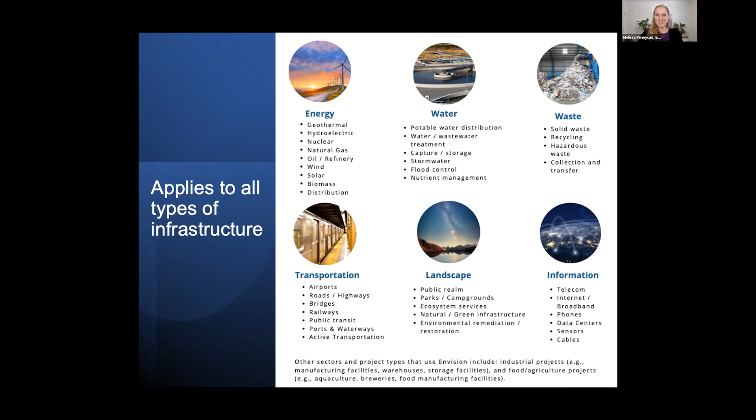Envision is a great tool that helps governments and communities address a number of pressing priorities and challenges. So Envision can be used to support the attainment of net zero energy and emissions, as an example. It's a great tool to help mitigate and adapt to climate change. There's credits within Envision that focus on equity and social cohesion, economic development, sustainable resource management.

The list goes on. And what I've done on this next slide is I'm giving you a view of, at a glance, all of these sustainability and resilience indicators that are included in the Envision framework. So it really covers everything under the sun that comprises sustainability and resiliency from an infrastructure perspective. And I've highlighted particular credits on this slide that link back to those community and government priorities on the previous slide.

I want to also give you a credit close-up. So when I talk about this term credit, this is a term that we use to talk about each sustainability and resiliency indicator that's included in the framework. So we call them Envision credits. There are 64 of them in total, divided across 5 credit categories, including quality of life, leadership, resource allocation, natural world, and of course, climate and resilience. And each credit is formed in the same way. So typically it's presented in a 2-page spread.

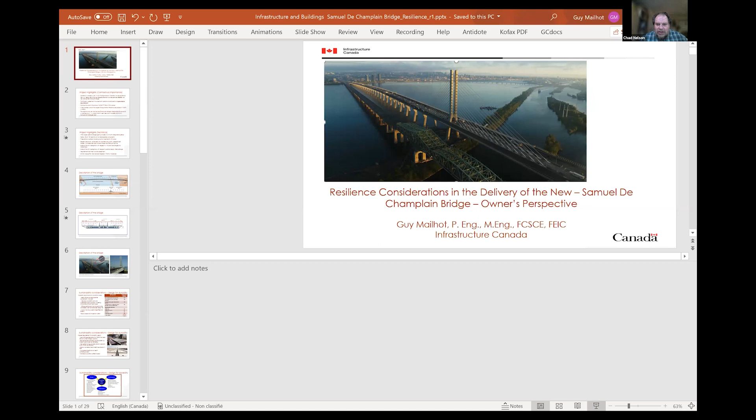So, well, first of all, hello to all from Montreal. It's a real pleasure to give this presentation describing some of the resilience and sustainability considerations which were accounted for in the delivery of the bridge. I hope you will enjoy the presentation and hopefully find it interesting. To start with, you can appreciate in this slide the new and original bridge. Unfortunately, this scene no longer exists as shown. The original bridge is currently being totally deconstructed after only 60 years of service, so not a very good example of how we define sustainability.

Some of the project highlights include a contract award in June 19, 2015 under a PPP delivery model for about 4 billion Canadian dollars. A project agreement which includes a combination of performance-based and prescriptive requirements. For information, when it was started, it was one of the largest transportation infrastructure projects in North America. The new Samuel de Champlain Bridge is responsible for about 50 million vehicles and 11 million public transit users per year, and also supports annually in excess of 20 billion in Canada-US trade.

Some of the technical highlights included an initial target date for bridge opening, which set an aggressive 42-month design-build period, design life of 125 years for all non-replaceable components, 3 distinct corridors with the central one dedicated to mass transit. You can see that there.

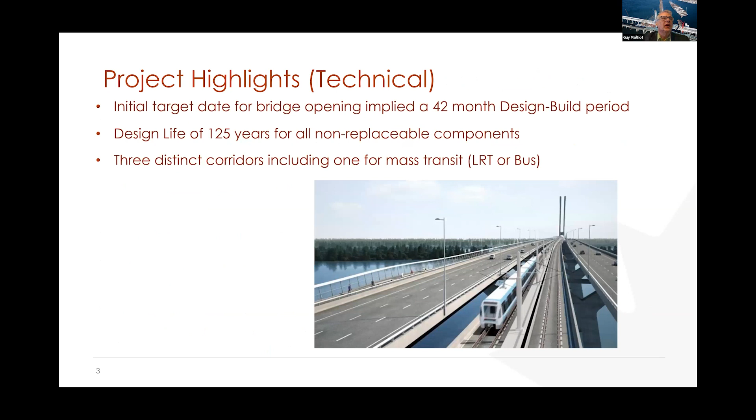As the bridge is the gateway to Montreal, the bridge visual impact was very important to the community. High architectural expectations were met by incorporating a signature cable-stayed bridge with distinctive W-shaped pier caps, a slightly curved bridge, and a sophisticated architectural lighting system.

State-of-the-art investigation for wind and ice were carried out for the bridge and its stay cables. State-of-the-art design approach with peer review was also required with respect to seismic design for a lifeline bridge, using at the time the new Canadian performance-based design approach. Technical requirements also included the development of a risk and threat assessment with hardening measures.

And as we noted, the project required Envision recognition. We started with the bronze level. However, platinum level, the highest level, was ultimately achieved.

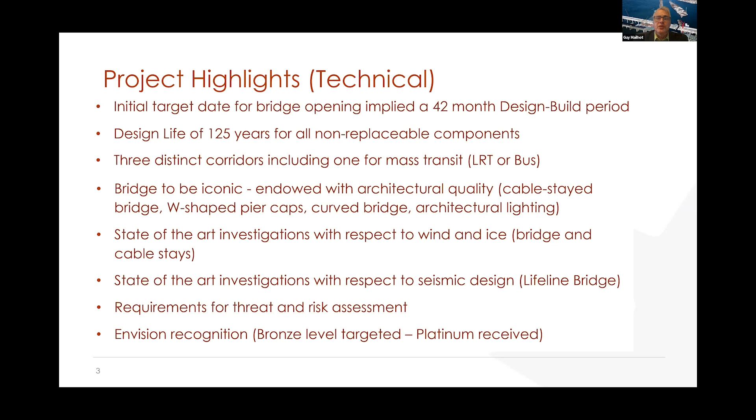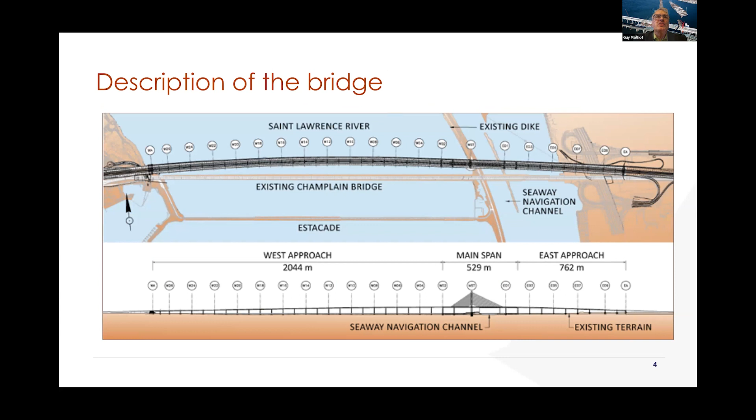The bridge measures 3.4 kilometers and links Brossard on the south shore of the St. Lawrence River to Île-des-Sœurs, which forms part of the city of Montreal. The main section, comprising an iconic 529 meter long asymmetrical cable-stayed bridge, spans over the International Seaway Navigational Channel. The bridge has a very slender tower and 240 meter main span.

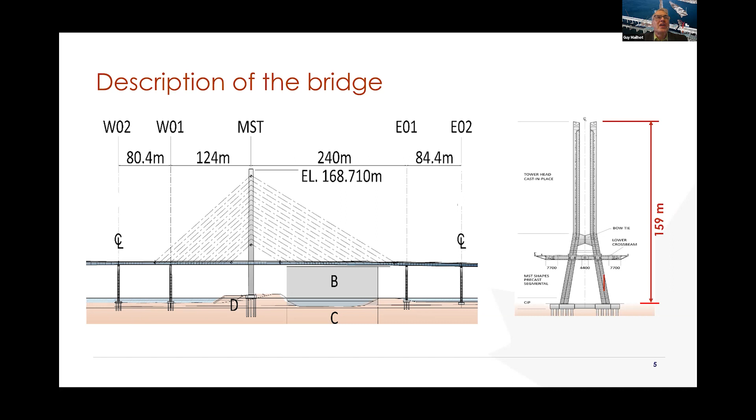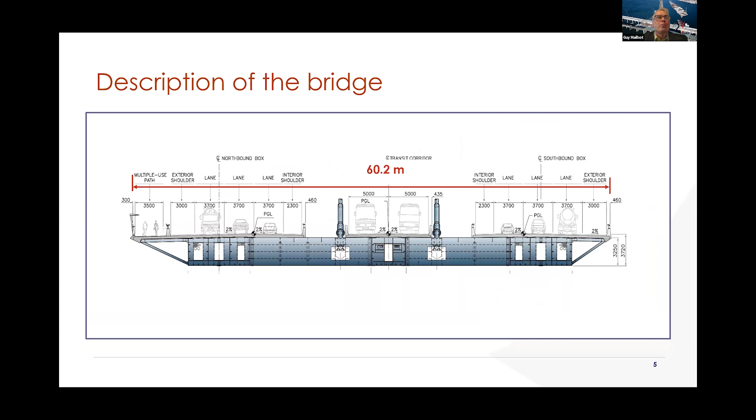The bridge is very wide at 60.2 meters. It may well be the widest cable-stayed bridge in the world, supported by only 2 cable planes. These 2 images help appreciate the structure. The stays have a sheath diameter of 315 millimeters, and the longest stay measures about 244 meters. The stays are equipped with a unique system of rings to meet specific climate needs, which I'll discuss in a bit more detail.

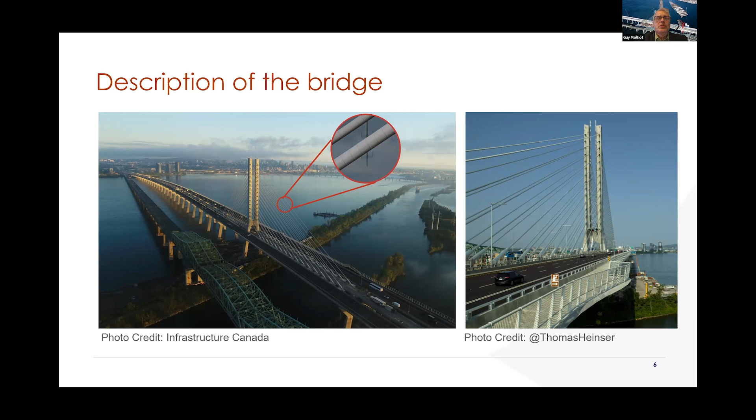For various reasons, including the poor performance of the original Champlain Bridge, durability was a key consideration. In this respect, Infrastructure Canada imposed a 125-year design life for all non-replaceable components, which included the foundation units, substructure, superstructure, and the deck slab. Stay cables were designed to current best practices with a targeted 65-year design life, but most importantly, were conceived to be replaceable.

Other imposed requirements included the need to develop a durability plan and undertake time-to-corrosion modeling using state-of-the-art techniques, fatigue resistance of all components considered over the extended design life, the need to account for stray electrical currents, and this is of particular significance considering the current implementation of an electrified rail system, and integration of a good access and inspection system. And I'll also say a few words on that.

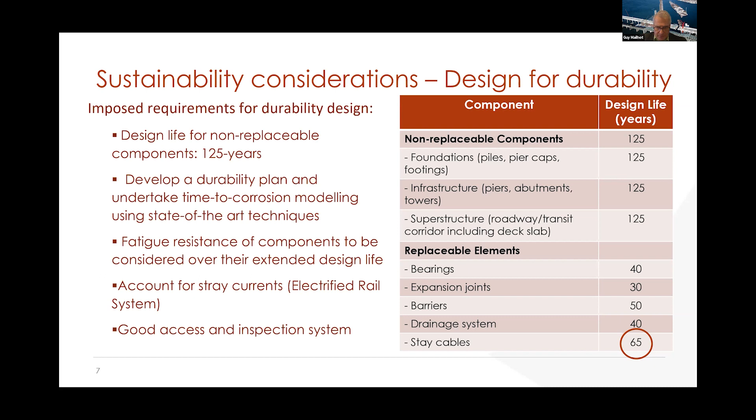Special requirements imposed for durability design included the use of stainless steel rebar for 100% of the deck slab and other strategic locations, probably the highest use of stainless rebar for any project in North America. Service life demonstrated using fib Bulletin 34, which is a model code for service life design.

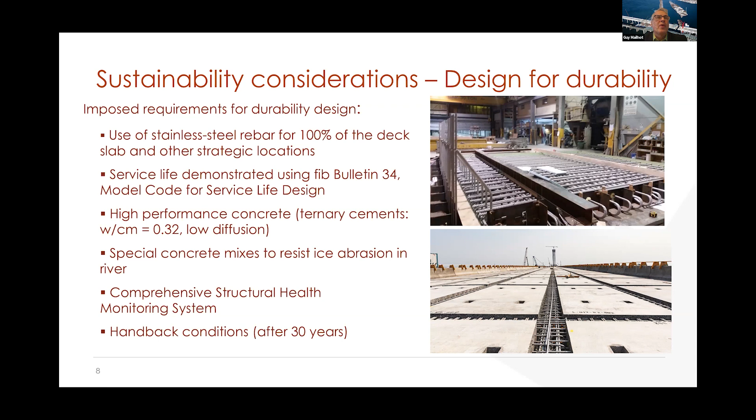We incorporate high performance concrete with ternary cements, providing very high resistance to chloride ion penetration. Special concrete mixes had to be developed to resist ice abrasion in the river. And there is a comprehensive structural health monitoring system with over 400 individual instruments.

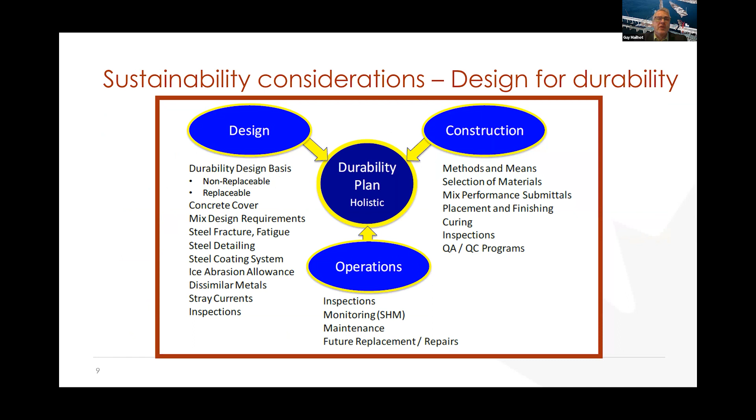Of course, resilience and durability cannot be achieved solely from a design perspective. It must be looked at holistically to include the construction phase, for example, ensuring quality of construction and choice of materials, but also the operational phase, including routine maintenance and inspections. It is said that a bridge that is well maintained is one that is easily accessible.

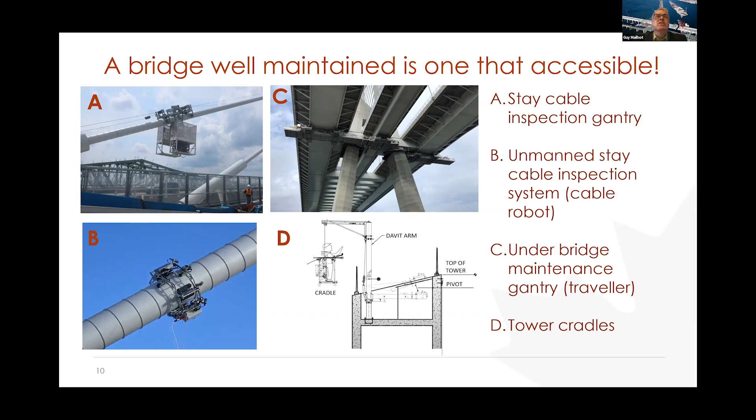We also have an extensive network of staircases and ladders in the hollow piers and pier caps. There's actually a shuttle path in the structure's 3.4 kilometer long box girders and a whole bunch of other devices, including an elevator in the main span tower.

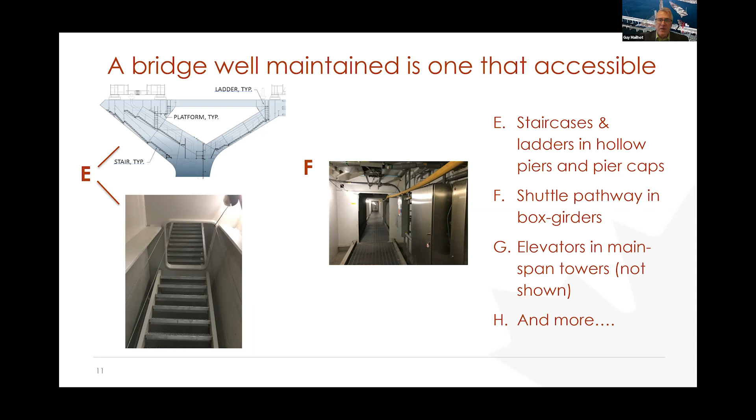Special investigations related to design of the stay cables to mitigate ice shedding issues started with the site-specific climate study. This was performed by the National Research Council of Canada, where it was determined that Montreal experiences 6.3 icing events per year on average, based on 347 freezing rain events, and where the 1 in 50 year ice accretion on the cylinder would correspond to about 33 millimeters of ice as a result of 60 millimeters of vertical freezing rain.

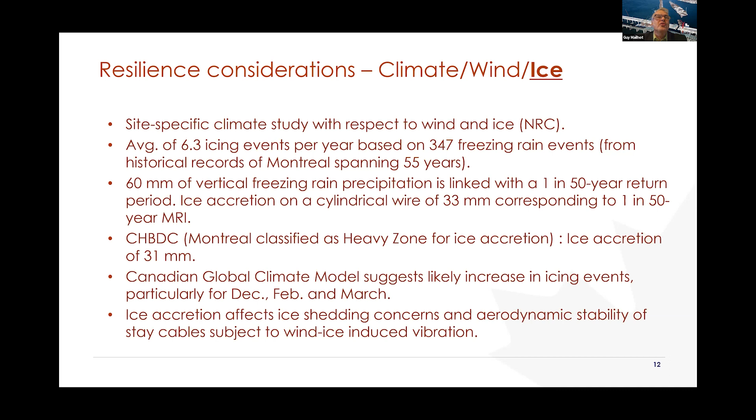It is interesting to note that the current Canadian Highway Bridge Design Code classifies Montreal as a heavy zone for ice, where ice accretion of 31 millimeters is expected. To make matters worse, the Canadian Global Climate Model suggested likely increases in icing events, particularly for the months of December, February, and March. And ice accretion affects both ice shedding concerns, but also the risk of aerodynamic excitation under wind and ice loading.

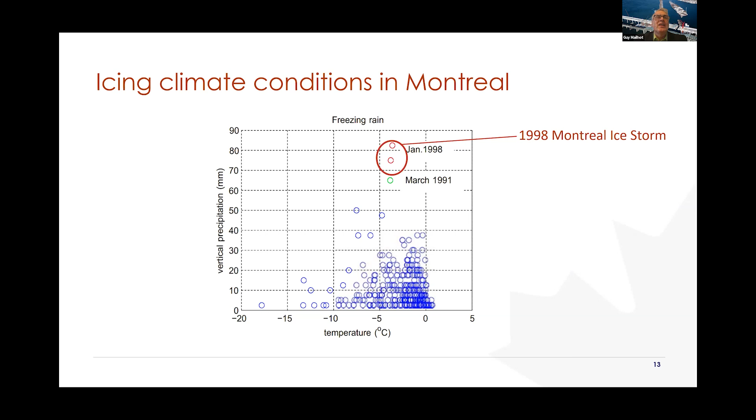A number of cable stayed bridges have experienced similar issues related to ice shedding.

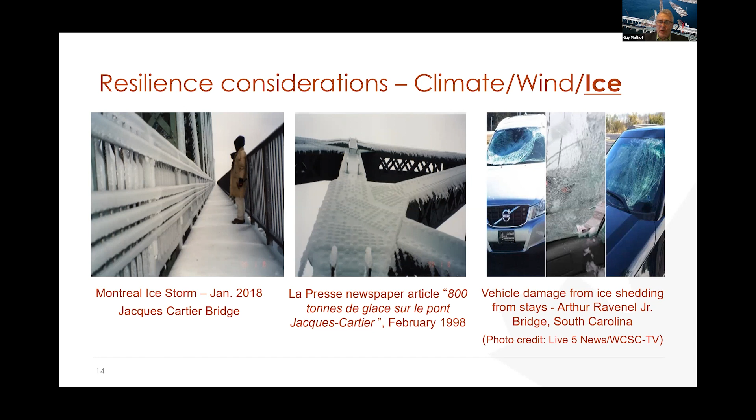To mitigate ice shedding problems, our private partner was required to develop and apply procedures for reducing and mitigating risk of interruptions to users due to snow or ice falling off onto the traffic lanes. Working with the supplier of the stay cable system, a significant amount of R&D was performed to investigate the problem and to develop a mitigation approach.

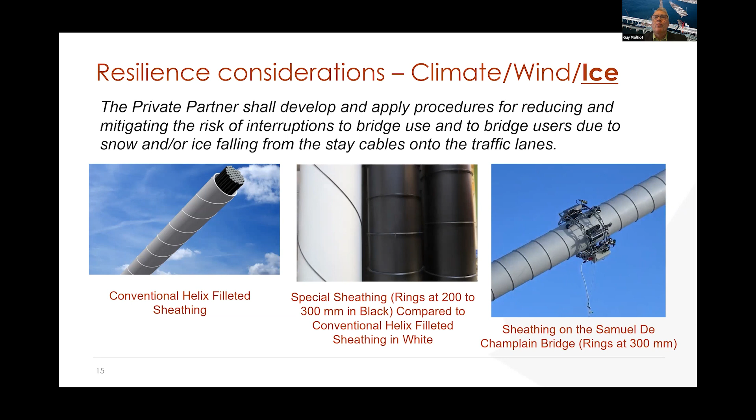The adopted solution consisted of modifying the conventional helical filleted system shown in the image to the left by incorporating a system of rings with greater height so as to favor breakup of the ice into smaller and more fragile pieces.

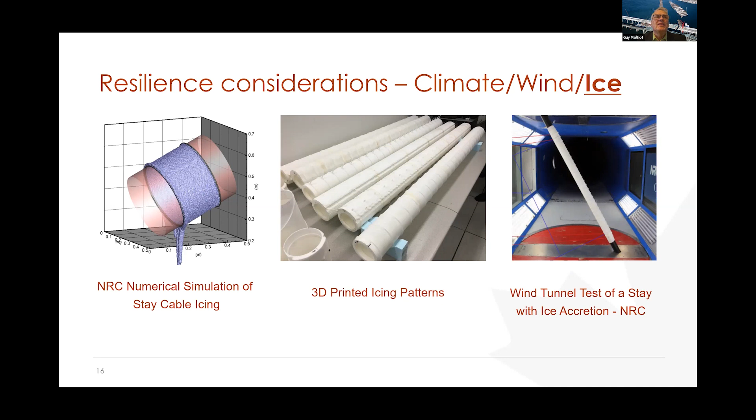This represents quite innovative and leading edge testing in the field of ice-induced stay cable excitation.

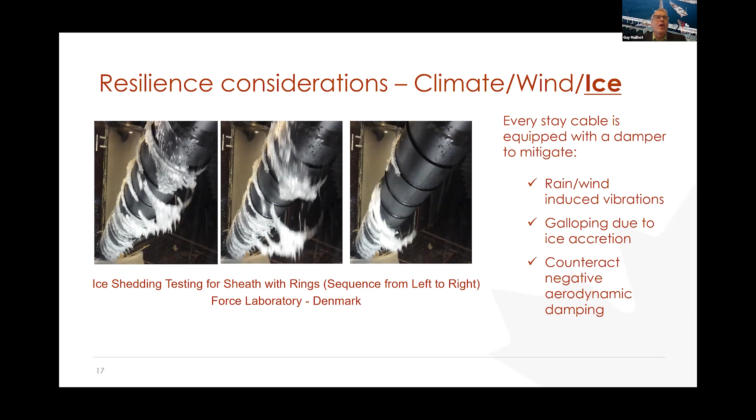Investigations in a climate chamber of the ice shedding character were also performed at full scale in Force Technology Laboratory in Denmark. The images on this slide show, from left to right, the ice shedding properties of the custom cable sheathing. All stays on the bridge were equipped with dampers to mitigate against rain, wind-induced vibration of the stays, galloping due to ice accretion on the stays, and to counteract the negative aerodynamic damping properties of the stays with ice.

Their approach is based on the thinking that the mesh will hold the ice in place longer, allowing it to melt and or shed in a number of smaller events. The researchers simulated ice formation for both a smooth pipe and a pipe equipped with 4 x 8 mm steel rope meshing, and then heated the interior of the pipes, measuring the mass loss with time.

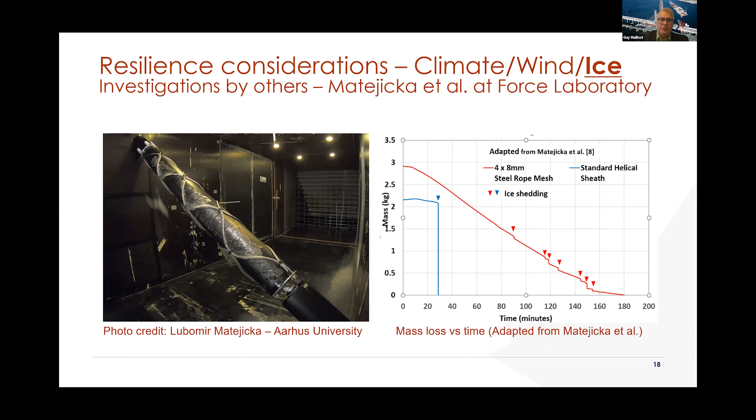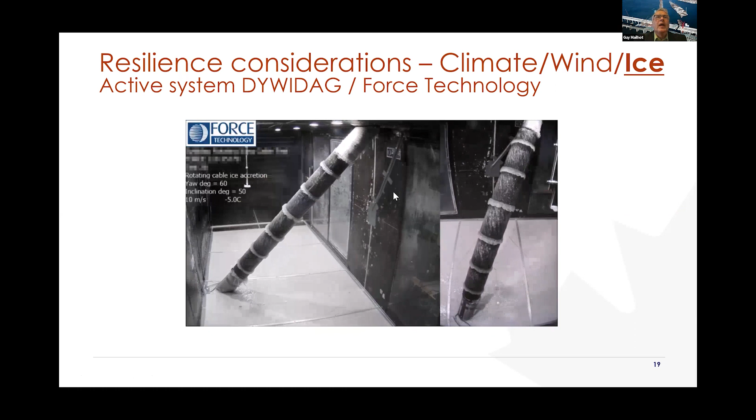The supplier of the innovative ring sheathing system on this Samuel De Champlain bridge has continued to research the problem and has proposed the ring system in combination with an active system which rotates the sheath. DYWIDAG has provided the following video which illustrates the concept and the ice testing setup.

Note how the ice builds up at the rings, which can then hold on to the ice. The formation of a symmetrical pattern of accretion favors retention and also favors the aerodynamic properties of the ice stays.

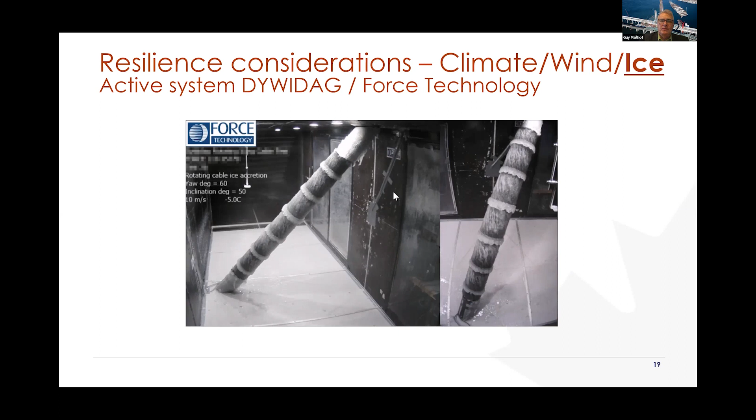To give you a sense of what can happen to bridge stays if the issue of rain and wind induced excitation is not properly accounted for, I have a short video clip obtained from a lecture provided with permission from Professor Holger Svensson of the Technical University of Dresden. You can see how the cables are working really hard under the excitation.

Infrastructure Canada also required the undertaking of state-of-the-art wind studies, performed by Western University. Canada is fortunate to have 3 of the world's leading wind research institutes, namely the NRC, RWDI, and Western University. Wind effects were required to consider the effects of the neighboring original Champlain Bridge and the effects of wind on traffic. Wind characteristics of the site were performed by Western University, including the collection of wind data directly from the original Champlain Bridge before the PPP project was issued. Sectional wind tunnel testing with traffic was performed by West Wind Laboratory in California, and full aeroelastic wind tunnel testing at 1 to 150 scale was carried out at Western University.

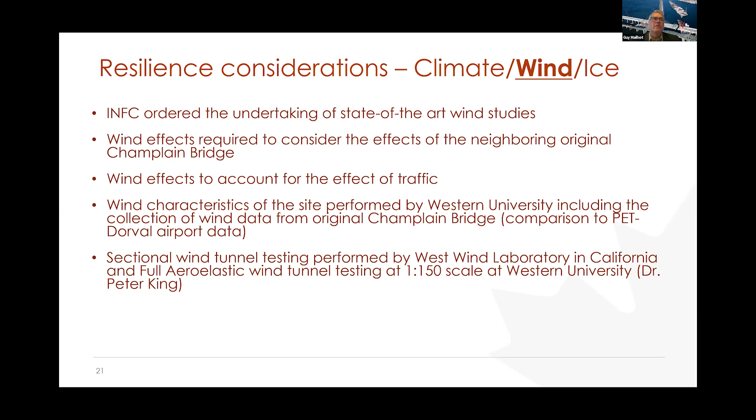The bridge was to remain aerodynamically stable for the 1 in 10,000 year winds, corresponding to 48 meters per second. The bridge was actually stable for winds approaching 70 meters per second, or 252 kilometers per hour.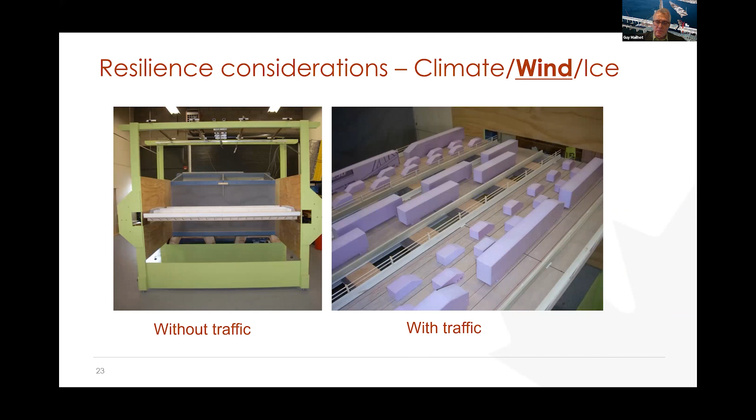The bridge was required to be tested with and without the presence of the original bridge in both the final configuration and critical construction stages. Pictures are shown here in the wind tunnel facility at Western University. You can also appreciate that the effects of the construction equipment used during construction, such as the tall tower crane, were also accurately accounted for in the investigations.

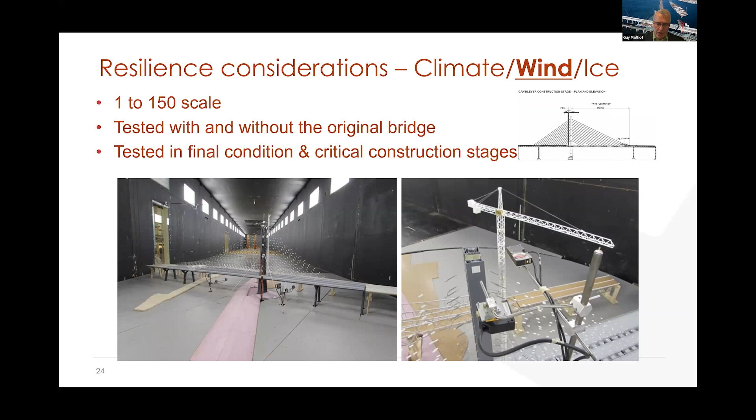This event occurred on June 10, 2008 on the original Champlain Bridge. A number of trucks were affected. It looks like the light pole in the image to the right may have helped prevent the tractor trailer from actually falling off the bridge. In the image to the left, you have something that looks like a domino effect — all to say that the wind also affects the users of the bridge.

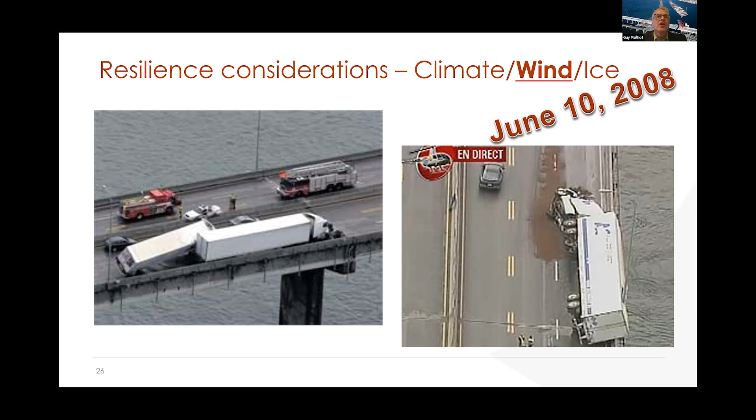Fires were typically of concern for the heritage type of timber bridges. We don't usually think of fire protection in the context of a modern steel bridge. However, bad things can happen.

In 1992, as a consultant, I was involved in the replacement of a short overpass located at the south end of the Jacques-Cartier Bridge in Montreal. Only 2 years after the original structure was replaced, a diesel tanker truck flipped over directly under the new overpass. I was called in to assist in the emergency response and reinstatement works. The steel was totally distorted, the rubber bearings had melted, and concrete had spalled off the deck and abutments.

For the new Samuel Champlain Bridge, some attention was given to fire protection. The stay cables of the bridge have fire protection in their lower portion, so I guess you can say that they are designed for both fire and ice. The bridge has 2 large emergency generators concealed in its abutments, which are equipped with fire suppression systems. Also, as part of the risk and threat mitigation, the bridge had to be able to resist a significant pool of ignited fuel in the event of a fuel spill on its deck. This was required in an effort to help deliver a resilient bridge.

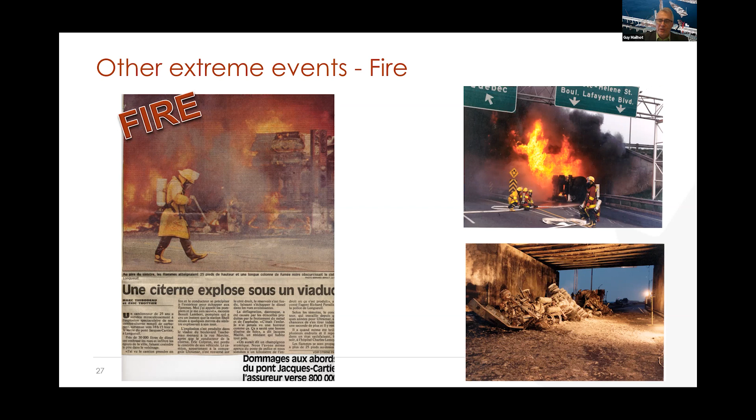With respect to earthquake, the bridge was designed as a lifeline bridge using the new performance-based design approach that was initiated at the time. Under this new Canadian design approach, for a 1 in 1,000 year event, we would expect business as normal. Under a severe 1 in 2,500 year event, having a 2% probability of exceedance in 50 years, we would expect that the bridge would be usable for emergency traffic. At least 50% of the lanes would remain operational. The light rail train would be serviceable at reduced speeds, but most importantly, the bridge would be repairable.

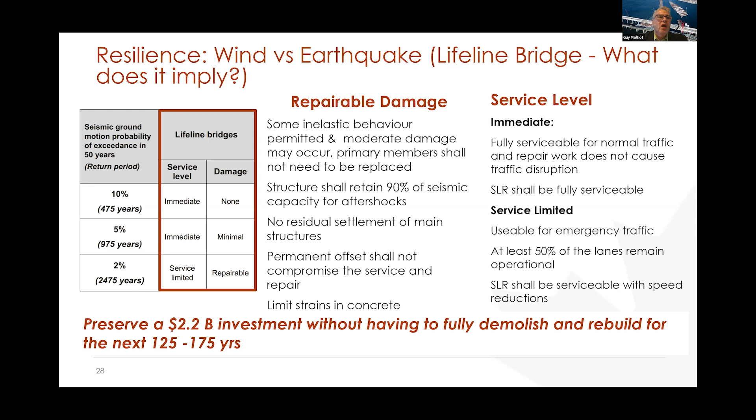All to say that in the context of resilience and sustainability, we will want to preserve a $2.2 billion investment without having to fully demolish and rebuild for the next 125 years or more. And I think I'll end my talk on that note. And with that, thank you very much.

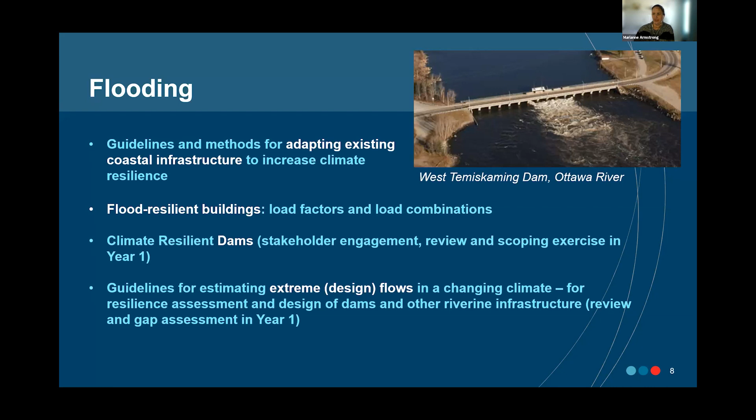We're also looking at dams, where we've been engaging with the Canadian Dam Association, as well as reviewing all different aspects of dams to try to understand how to make them more climate resilient. Here, we're just doing the review and scoping exercise in our first year because it's a new area for us, and we hope to launch a series of projects in the near future. And finally, under flooding, we're looking at extreme flows in a changing climate so that we can improve the design of dams as well as other riverine infrastructure.

Nature-based solutions is another one of the newer areas under our work. We did some work on coastal nature-based solutions in our previous phase. We're continuing on that line of work in a particular collaboration with DND, NRCan, ISC, as well as CIRNAC. We are expanding our nature-based solutions work to now look at mitigating urban heat islanding, as well as mitigating urban flooding. So projects there include reviewing different urban heat island effects and mitigation strategies, including looking at the role of municipal water bodies in reducing urban heat islanding.

We're also looking at preventing building overheating as part of that suite of work, so the community and the building within it. On the urban flooding side, we are looking more closely at nature-based solutions for commercial roofs. NRC a while ago was looking at green roofs for commercial roofs. Now we're expanding that to blue roofs. So these are roofs that can contain water and help mitigate the runoff during urban flooding events and extreme urban flooding. So we have a whole consortium of roofing members on board there to help work on that area.

We're also looking at evaluating the effectiveness of different types of natural flood mitigation measures, and also looking at how natural as well as gray infrastructure can work together in a real-time control strategy to help mitigate urban flooding. And of note here as well, we've launched an international research group with CIB, which is a buildings research organization, called Task Group 97, which is on nature-based solutions for climate resilient buildings and communities. So looking to leverage the work that's done internationally in that space as well.

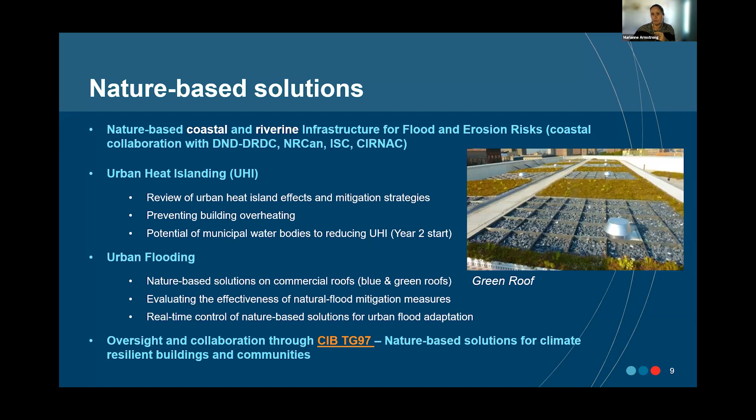So code standards and specifications, I've alluded to some of this already. We have a few CSA contracts that were recently launched or we're about to launch. We're moving the durability material standard forward one more time. We first moved it from a guideline to a standard. Now we're going to look to integrate climate change considerations into that standard. We're also moving forward on the fenestration standard to integrate likely the future climate data into the design of fenestration. So that's windows and doors, I think, are included in there as well.

We're moving our guideline on coastal risk assessment to a standard. We are looking to develop a new standard on risk assessment of dams, and also likely moving forward on work with the CSA on the electrical code. We're going to move the wildland urban interface design guideline forward to a standard as well as keep working with Canadian Highway Bridge Design Code to increase the resilience and to hopefully integrate the future climate design data.

I do have to mention on codes and standards that we can only do so much. It's up to the committees to decide what's in and what's out. Ultimately, this is what we're trying to get done as well with those committees and to work with them within the process. So with the CHBDC committees, we're going to be working as well on galvanic corrosion. So working on a new guideline for galvanic corrosion in a changing climate.

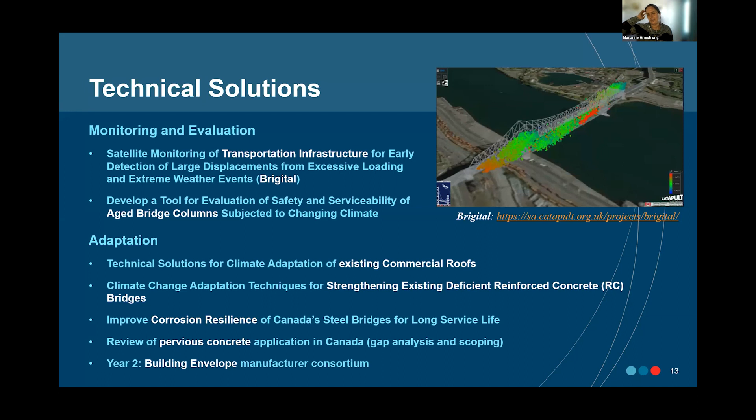And finally, we are launching this year a consortium of building envelope manufacturers, so mainly wall manufacturers and components of walls, to get a sense of how they'll perform in future climates.